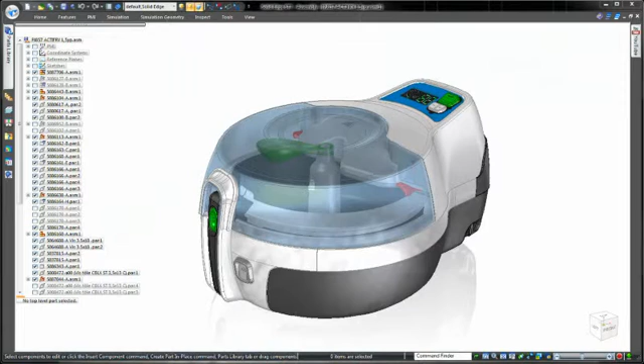Solid Edge delivers intuitive tools for complex shape construction, a must for designers of ergonomic and aesthetically pleasing consumer products. Here we have a kitchen appliance from one of our customers, Tefal. To demonstrate Solid Edge's capabilities, we'll redesign the rear panel of this domestic fryer to eliminate physical interference between its cooling fan and the rear casing.

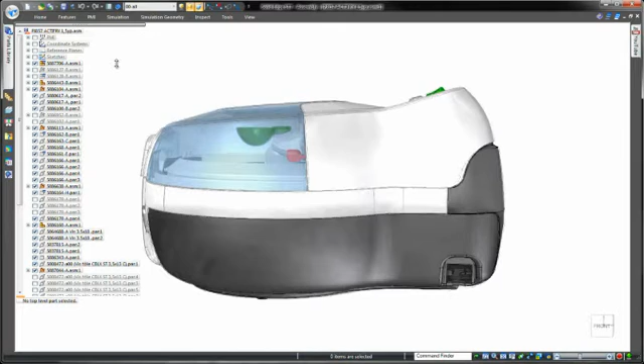An industrial designer has modified the rear panel in conceptual sketches, so we'll display these in Solid Edge. This new design accommodates the repositioned fan while also providing a handhold to easily lift the fryer. We'll use this collection of sketches as a template to guide curve creation, ensuring we closely match the designer's vision.

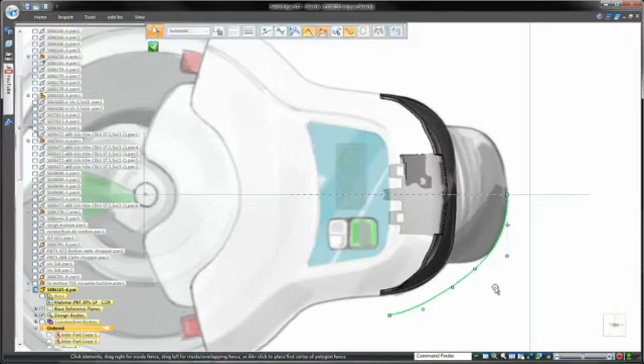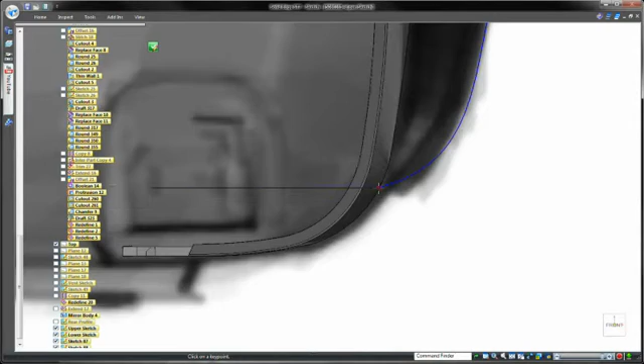Here we'll use two pre-existing sketches placed relative to the top and bottom in the industrial design sketch. Once again, we'll draw a curve to match the side profile of our template and connect the endpoints to these upper and lower sketches to define the exact start and end points for the final feature. We drag control points to replicate the conceptual shape.

The cross and guide curves must be connected to create a successful surface feature, and Solid Edge Blue Dot does the job.

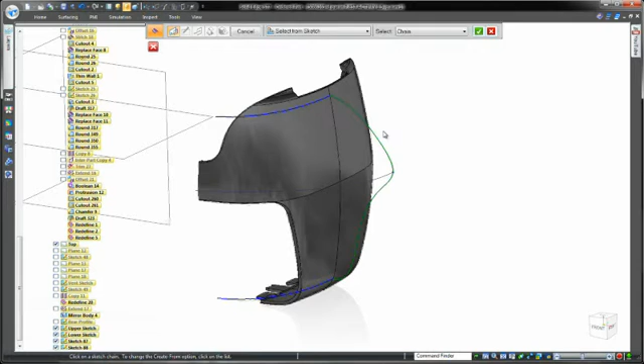We'll extrude this curve to create a construction surface for controlling tangency across the midline of a symmetric part. BlueSurf within Solid Edge enables us to loft a surface between the three curves while guiding its shape with the edge of the construction surface. Individual tangency controls ensure that the BlueSurf is tangent continuous with the construction surface and thus the mirrored face.

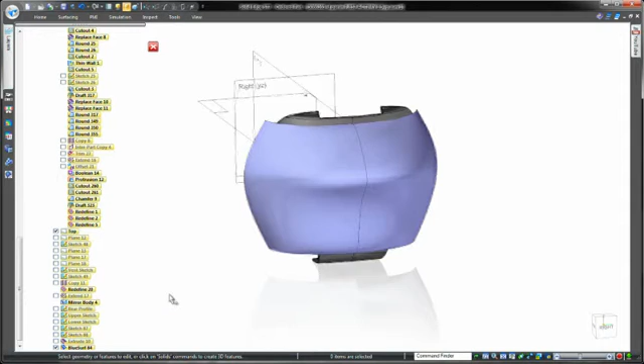Our next task is to trim away part of the surface we don't need. We'll project onto our surface an existing curve based on the conceptual sketch. Simple and fast.

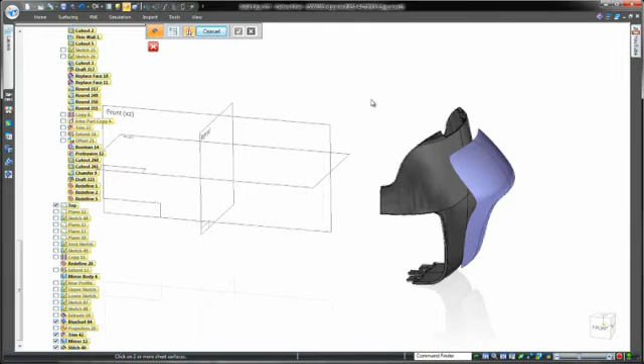To complete this rear surface, we'll stitch together the two halves. The ruled surface command extends the edges through the existing casing part. Advanced rounding really aids aesthetics, so we'll place a constant width round along the edges.

Next, we'll use surface body by boundary to cap off the inside of the surface body. Stitching these two faces will form a solid body that we can use to punch or emboss the original part. Simple and fast.

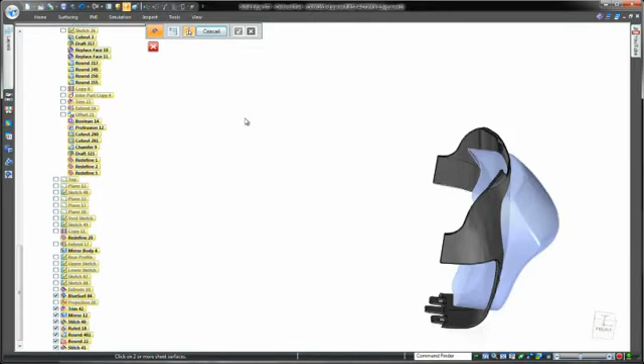We can finish the design by rounding the resulting edges.

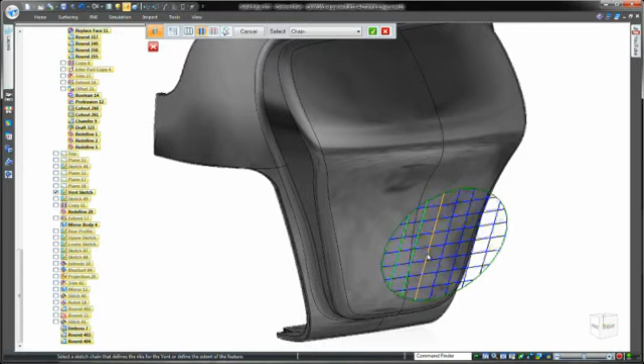Since our design goal is to make space for an exhaust fan, we need to build in a vent. The Vent tool constructs a customizable series of ribs and spars in an array using any basic sketch. Imagine creating this complicated feature with traditional cutouts and extrusions.

Creating complex shapes in Solid Edge is easy, yet smoothness and flow of the final plastic is of utmost importance. In this part, we have 6 individual faces along the top. The Zebra Stripe visual inspection tool helps.

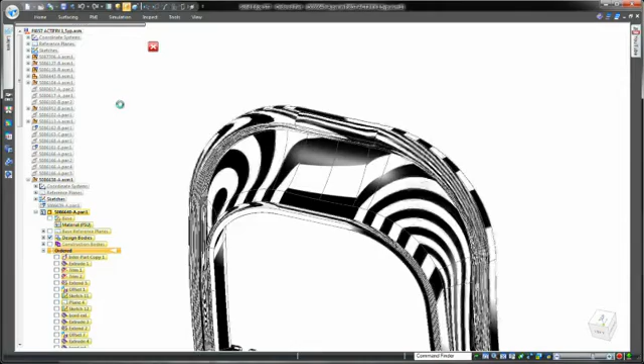Note that the zebra stripes reflect jagged transitions across the patches, so we'll use the Redefine tool to merge the 6 patches into one beautiful and continuous surface.

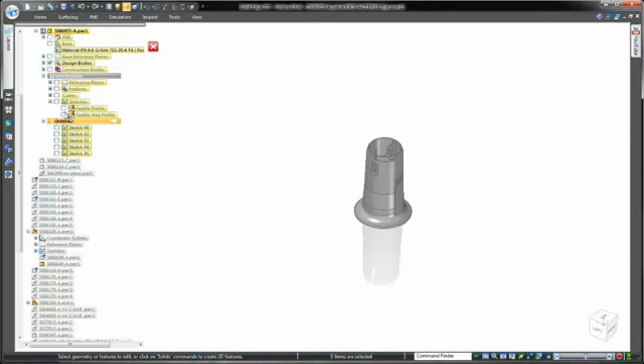Now that we've seen some powerful surfacing tools in Solid Edge, watch as we create complex geometry utilizing multiple solid bodies. This fryer uses a stirring paddle to ensure an even distribution of cooking oil throughout the food, so we need to design an arm coming off the paddle's mounting hub.

To begin, we have a top view sketch of the arm's shape and a side profile sketch depicting how the top of the arm curves away from the center mount. We'll combine these sketches to generate a resulting cross curve of their virtual intersections.

As we create a series of profiles through which we can create a lofted feature, we'll use the pre-existing curves to guide the feature's transition through the cross sections.

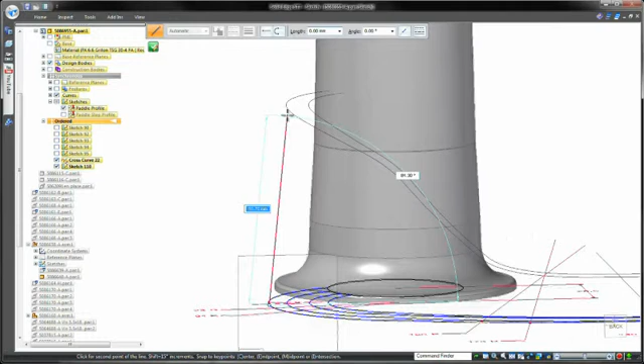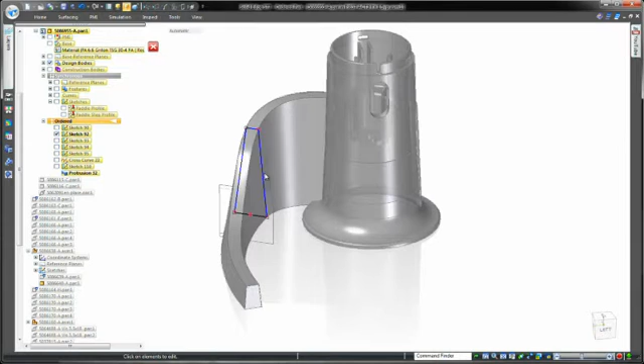At any point, we can make a change to the defining cross-section profiles. Watch how the complex lofted feature dynamically updates. In this case, we want to retain the original design.

To finish this arm, we'll place a constant width round on the top edges. The end of the paddle is a proven design that we're simply going to integrate into our paddle arm. Watch as we use the Replace Face command to trim away the end of the arm body.

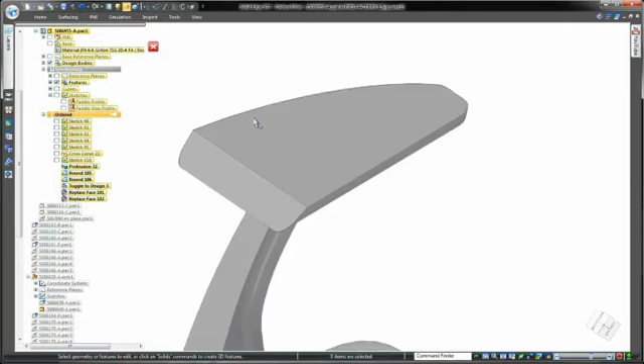Our final goal is to hollow out the paddle's face. A Replace Face option allows us to add a cross-section sketch which we can pull inward.

That was easy. In this demonstration, we've proven that Solid Edge provides a broad collection of surface and solid modeling tools, perfect for creation of complex consumer products.